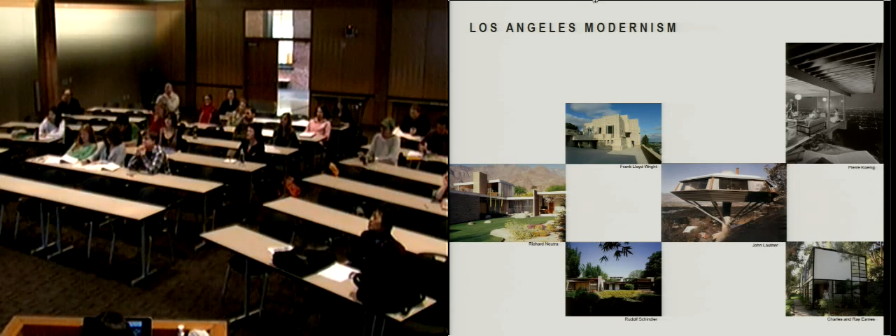For those of you who do not know Los Angeles very well, or for those of you who know a little bit about it, you might or might not know that LA is home to many examples of great domestic architecture. So if you look at this slide, you're looking at houses by Frank Lloyd Wright, John Lautner, Rudolf Schindler, and Richard Neutra. Now this very rich tradition continues today, but it's expanded to encompass building types of all scales, sizes, and programs.

And so we have Frank Gehry, Disney Hall. We have Morphosis, Eric Owen Moss, Hodgetts and Fung. And then coming down to practitioners in their 50s, we have Neil Denari, Daly Genik. You probably know most of these names. And then I sort of did this decade thing. So practitioners in their late 40s or mid 40s include Lorcan O'Herlihy and Larry Scarpa.

Clive Wilkinson, and SPF. So there's a lot of really interesting work going on in Los Angeles. And one of the interesting things is that now there's a younger generation of practitioners in their 30s who are coming up, and whose work really encompasses fully the digital tools that are out there for use. But one thing I would say is different with respect to how they use these digital tools is that much of their emphasis is really on performativity. I think that's a bit of a generational shift, and it's certainly spurred by what we see going on in the world today.

So John's and my practice falls within the trajectory of practitioners in their 40s who have been trying to really build. Our first projects were completed in 1999, a little bit more than a decade ago already. We actually completed 3 projects in South Korea. I'm not going to talk about them, just show them briefly. This is a 50,000 square foot golf club outside of Busan, South Korea. This is a same-scale public swim center in a man-made new park in the city of Ulsan, which is an industrial city, again, in South Korea.

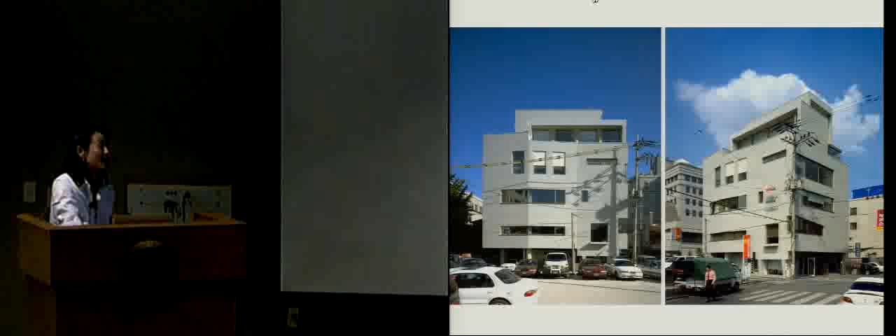And then finally, in the city of Seoul, in a very commercial, trendy, kind of cacophonous neighborhood, is this small commercial building that we did for a client who was the distributor of Coca-Cola in South Korea, and so she wanted something a little bit more hip, a little bit more fun.

But really, while we were doing that work, what we were really trying to do was to build up our contacts in Los Angeles and to really begin to build up a practice there. So if you look at this map, it sort of tells you what we've done for the last

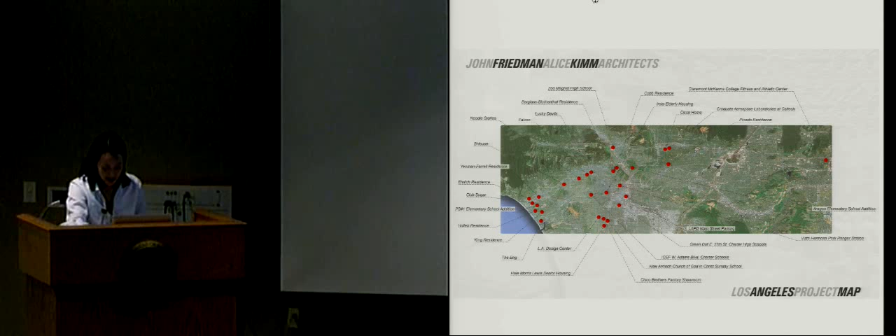15 years, really, since we started practicing together in 1995, 1996. The red dots are actually projects that we have completed in the greater Los Angeles area, and that's what I will concentrate on now. We worked on a range of program types that includes houses, housing, public schools, private schools, commercial renovations, and university buildings.

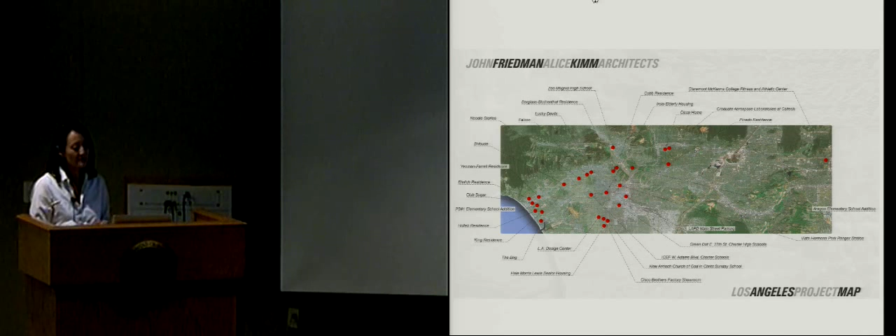And I would say that our sort of concentration is really on the creation of meaningful public space or social space. And when we use the term social space, it is a very deliberate thing because we find social space in private programs such as single-family residences even, and we're always looking for ways to create spaces and environments that will kind of catalyze productive interaction between people.

And so whether we're working on an academic university building or we're working on a single-family residence, we're always sort of looking for those kinds of opportunities.

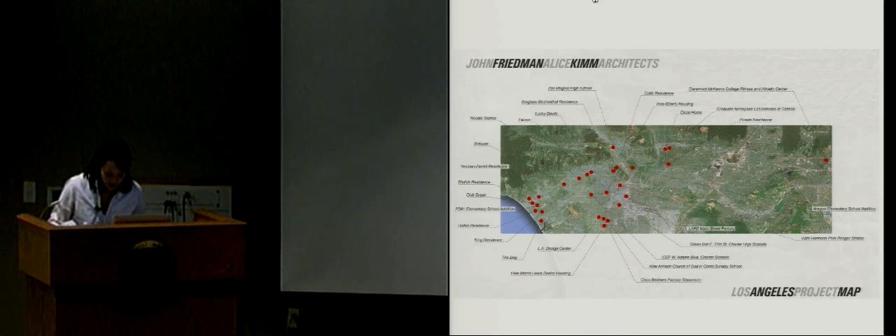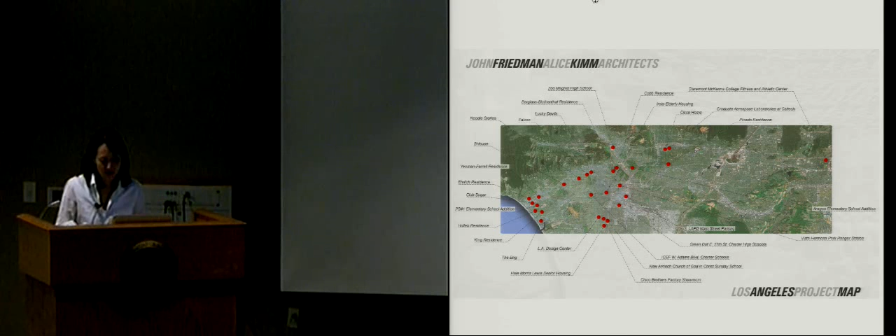The last point I want to make before getting into the work is that if John were here and we were both talking to you, we would probably be switching the talking duties back and forth. And we do that because it's indicative of the way we work. We really do work in a collaborative way, not just with each other, but with those people in our office, and basically pass the work back and forth, whether we're looking at models or digital models or drawings.

And really, there's kind of one rule in the office, which is that we all have to be happy with the work before it goes out the door. Sometimes that can take a very long time, and we have to keep people waiting. But that's sort of the unspoken rule in the office.

And that we feel is also kind of very illustrative of the kind of a new paradigm of collaborative working that we're finding in practice today, because of the emphasis on environmentally ethical practice and sustainability. We are finding more and more that our collaborations with engineers and other types of specialists is really occurring from the very beginning of any design process.

And this is really, it's really been kind of an amazing transformation of the way we work, to go through this with some of our more recent work. And it's also probably the largest reason why I decided to go back and start teaching at USC, which is going through some pretty strong efforts right now to begin to integrate building sciences and technology into the design curriculum. So it's a very interesting time right now.

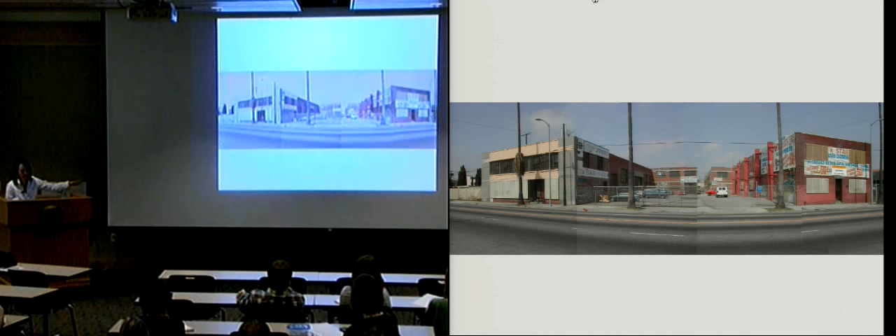One thing, or two things, that we saw as the challenges of this project: number one was how do we create a positive and dynamic image for this complex while not creating any kind of unwelcome foreign presence in this particular neighborhood? And secondly, how do we take advantage of the beauty that we saw inherent in the structure of these old buildings? So those were the two things that preoccupied us the most.

Our solution was to take these old buildings, clean them up, and then layer them with a set of light and differentiated heterogeneous materials that would together provide a set of new clothes for the buildings, but sit very lightly on them so that they would seem both permanent and impermanent at the same time. So you could have the feeling that they could be taken away at any moment, but they still at the same time give the project the identity that our client was looking for.

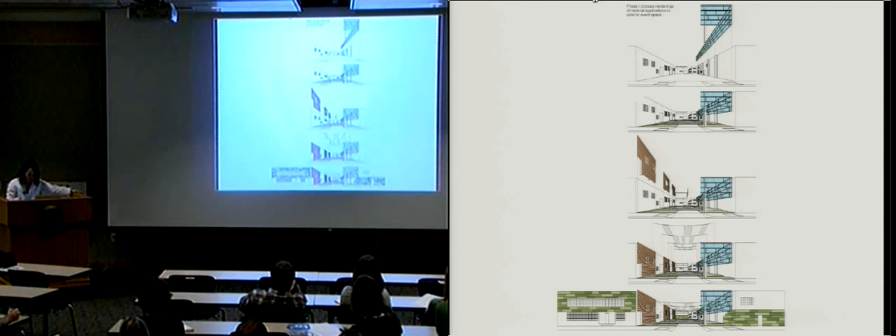They are dimensioned and sized to hold photovoltaic panels at a future date. We used the columns also to create regulating lines across the parking lot, which became the banding for the hardscape and grass strips that you'll see in a minute. And then we introduced a set of wood screens on the opposite side, and finally, we hung this kind of fabric canopy over the entire space.

So the result you can see here is that main courtyard space. And clearly the kind of early experimentation of projects such as Club Sugar really benefited us in terms of materials and ideas. In fact, we sometimes joke that this is our outdoor nightclub. The space has become a pretty large public event space, used for many different functions, parties, and galas. The AIA actually held one of their annual big awards galas at the LA Design Center.

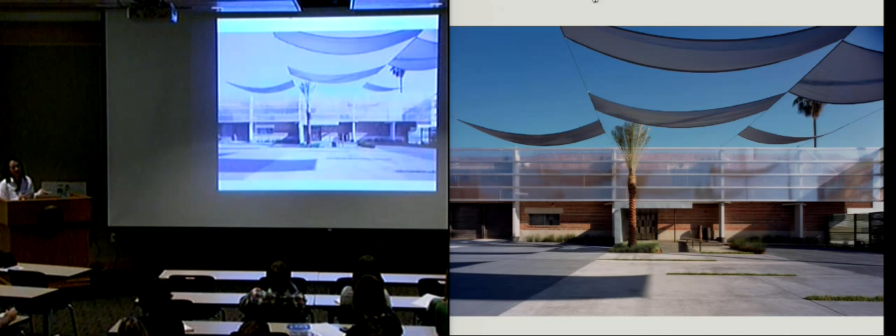But one thing that we were really struck by was how significant to the end result of the design the fabric canopy is. Because in LA, you think about sunshine and palm trees, but what you might not realize is that the sun, the light, the sky usually has no clouds in it, so it's always kind of unchanging, and there's a little bit of monotony to it, and it's usually more gray than blue. So what the fabric canopy does, aside from giving the courtyard a sense of intimacy and scale, is it actually starts to create shadows that move across the space throughout the day, and so it really brings a dynamic quality to the space that we really appreciated.

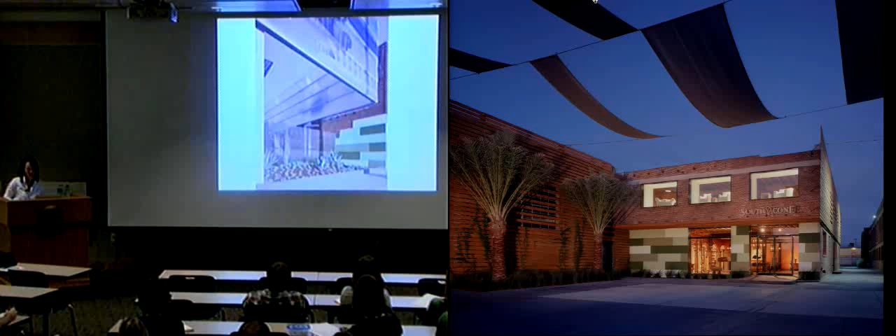So here's a view from the other side, looking to the back. This is a view of that polycarbonate screen, which wraps around and swings around in front of the building with some applied graphics that can be removed at any time. We did add one new column to hold up that corner.

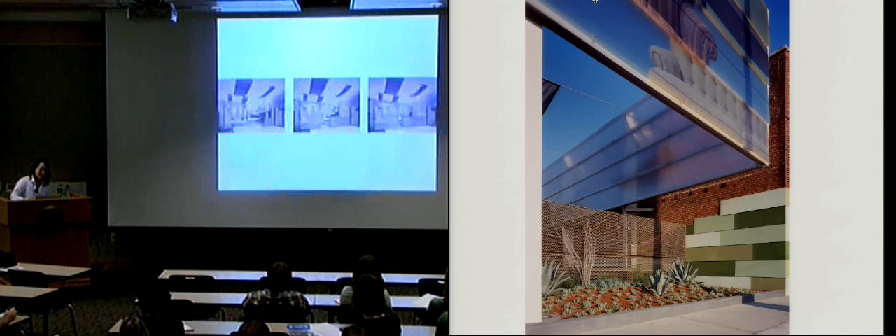And then here's a view of the sliding gate. The gate was a huge dilemma for our client.

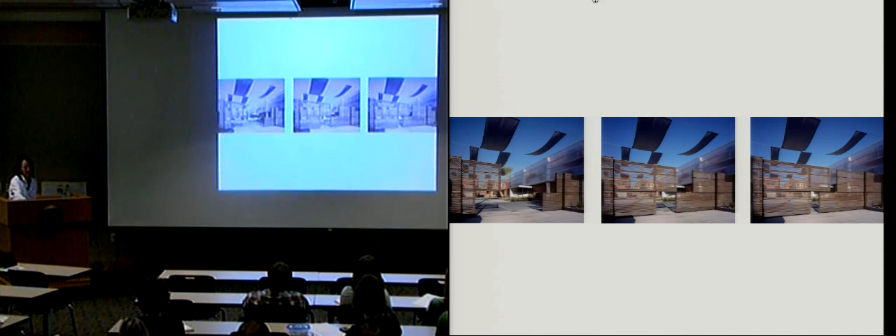He didn't know if he wanted a gate. He was like, I really want to be open to this neighborhood, but on the other hand, this is South LA and I have to worry about security. So our compromise solution was to make a very sturdy fence and gate, but one that nonetheless was extremely transparent. This is just some more detailed shots of the front entrance to one of the buildings, which becomes the headquarters of Cisco Brothers, our client's company.

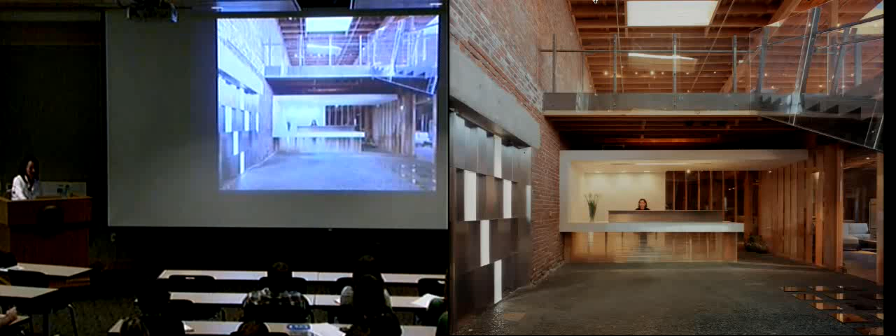On the interior, we actually removed 2 bays of the existing second floor structure to create a double height foyer atrium that houses a stair up to the second floor showrooms. The stair is made out of steel and plastic. Again, we love plastic. It's light, it's clear, unlike glass, which has that green edge and that sort of weight to it.

Up above, we added this floating platform to create a special little showroom area inside the main showroom space, but it actually covers up a loading dock below, which has a raised floor that raised up a portion of the second floor. So it's actually covering up, or taking advantage of, an existing condition.

This is the other side of that screen, and you can see the main showroom. Really, it was about looking at what we were given, which was this beautiful masonry building, this beautiful wood ceiling structure, which was covered by 40 years of gray paint when we got there. So we basically sandblasted it all and pretty much just left it alone. We added 2 rows of skylights, some light fixtures, and then other than that, we just let it kind of sing on its own.

So moving to some residential work. I would say that if the previous 2 projects I just showed emphasize that interest in materiality and the construction of what we call social space, this house really illustrates something that can be described as more of a love of pure space, activated by natural light. I think you will see that in a second.

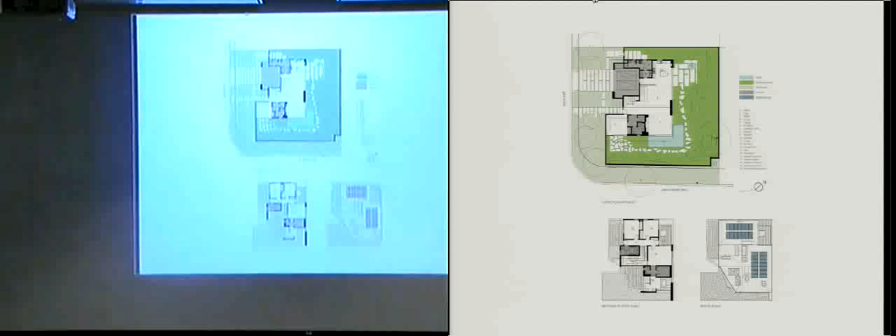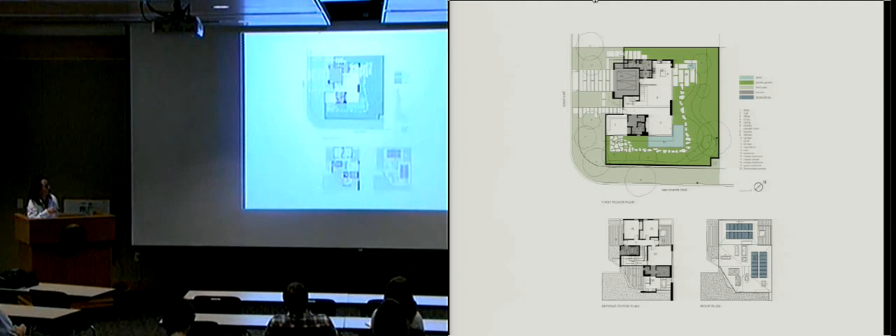And so the challenge spatially became, how do you manipulate the section and the plan to begin to bring light into that farthest northern reach of the house? And so we began to think about opening up what we call the diagonal void through the house, both in plan and in section.

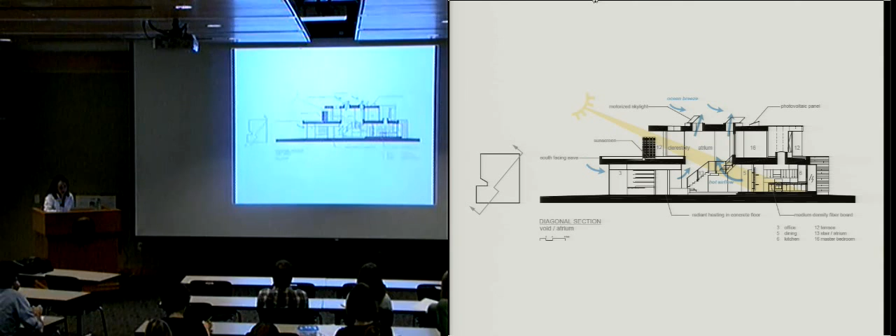And through this, what we call kind of this light monitor at the southern corner of the house, we drew light into that northernmost reach of the house. And you can see that a little bit more in the section. This is actually cutting through that diagonal void, and shows you how the stair creates a double height atrium, and then warm air is vented through these skylights, and then the light is kind of coming in and really hitting that kitchen space. So, and then these are sort of some of the sun analysis process that we went through to look at really how that sun moves through the house to the northern corner during three times of the year.

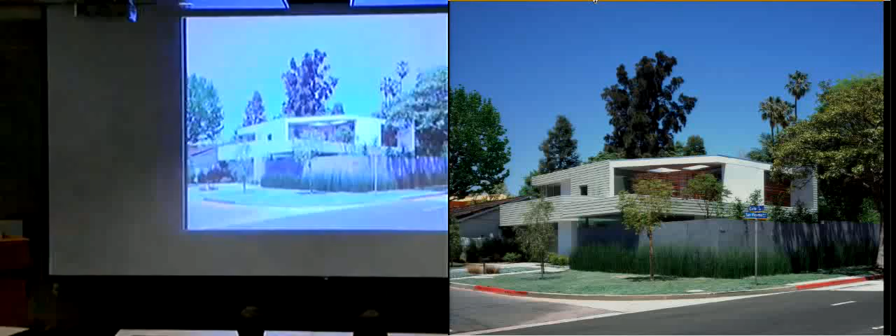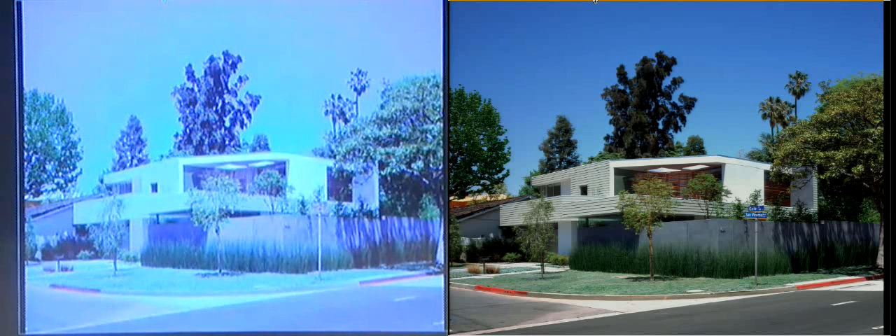So this is a view of the house as it was completed. By cutting back that corner and creating that sort of light monitor thing up there, we created what we felt was a really nice kind of reciprocal urban gesture to the corner, the street corner, which is fairly prominent. And we didn't want to make a mansion or something very bulky on the corner. So this also allowed us to sort of dematerialize the mass of the house at the street corner.

This is a view head-on from the western, kind of the southwestern side. You can see it's pretty solid to keep out the sun. The materials are painted cement board, plaster, and stainless steel garage doors. So they're all pretty eco-friendly.

But there are a few places where we did use wood, and one of them is you'll see these screens kind of weaving their way through the project, and then the front door, and the second floor of the house, and the stair. And so that wood is all sustainably harvested, and it was just used where we really felt we would get the most out of the materiality of it.

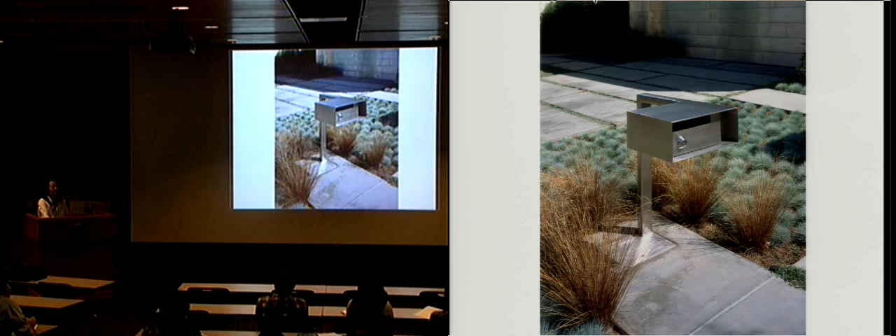I show the mailbox simply because it's sitting in the middle of this drought-resistant landscape. There's a gray water system hidden in the landscape, which takes water from the sinks, etc., and irrigates the property.

So this is a view from the inside. Again, natural light. We studied with Rafael Moneo, who, if there's one thing that he really understands, it's how to manipulate natural light through skylights, and he always taught us that light from multiple orientations is going to give you the best effect, because the light just kind of comes in and bounces around and really does amazing things. And so we always try to introduce light from as many different orientations as possible.

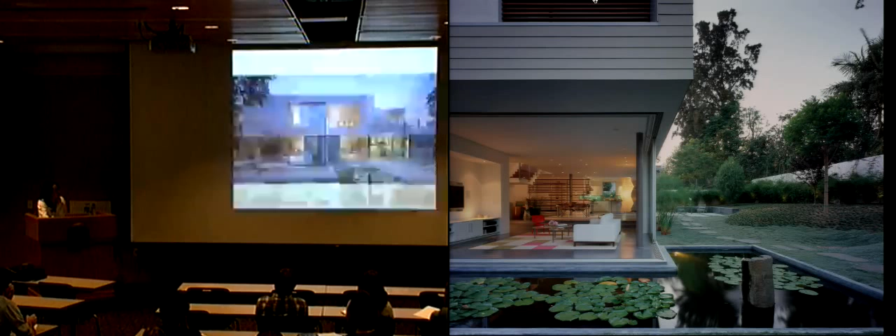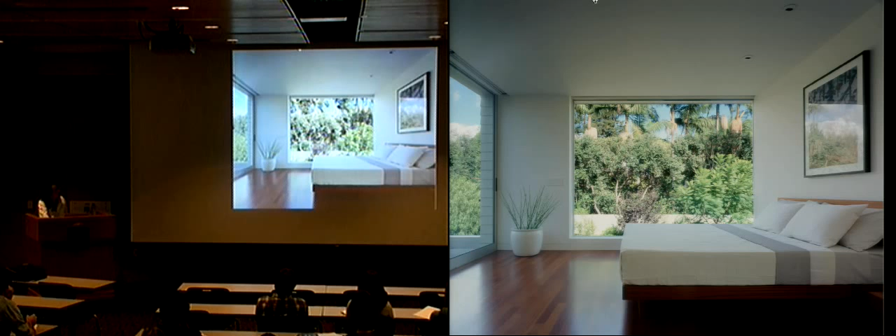Master bedroom, you can see up on the second floor, there's a big sliding door that can pull over the large opening. There actually is a glass guardrail here. You can't make it out really, but it's there. But when the door is completely open, you really feel like you're up there amongst the trees. And so he really loves that feeling.

If you think about the typical suburban house, it usually has a pretty impersonal front door and then a big private backyard. But our clients actually challenged us to open the house up more to the neighborhood. They really wanted to feel and participate in the community in a very emphatic way. So we got rid of the backyard and the front door. The front door is now here, and you end up with this large outdoor space, and the various rooms of the house are really oriented towards that corner and that street.

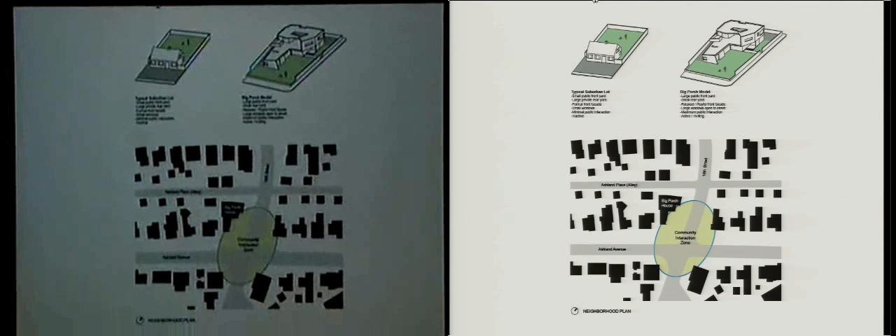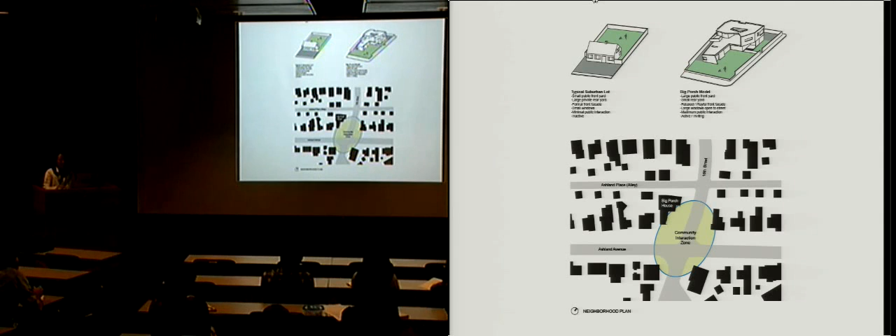So there are ways that they can close off rooms when they want privacy, but really, our clients are just outside or inside. They're always sort of interacting with their neighbors. I just find that to be pretty interesting.

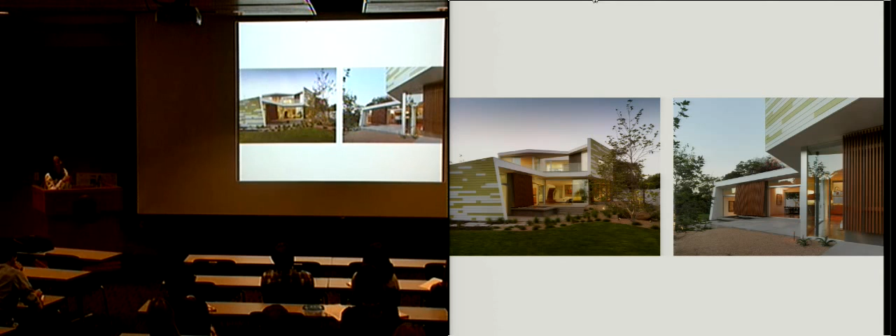This is a view from the street, and inside the wall, you can see that even the painted treatment of the cement board siding begins to dematerialize the mass of the house, and we began to play with ideas of transparency and the relationships between different rooms and the outside. Even at the second floor, the bedrooms wrap around this large roof terrace, which is like a second living room. The kids hang out here, their bedrooms are here, they hang out here, and they call out to people on the street and have a good time with that.

So the interior spaces are a little bit more sculpted than the previous house. Again, this has a lot to do with these particular clients.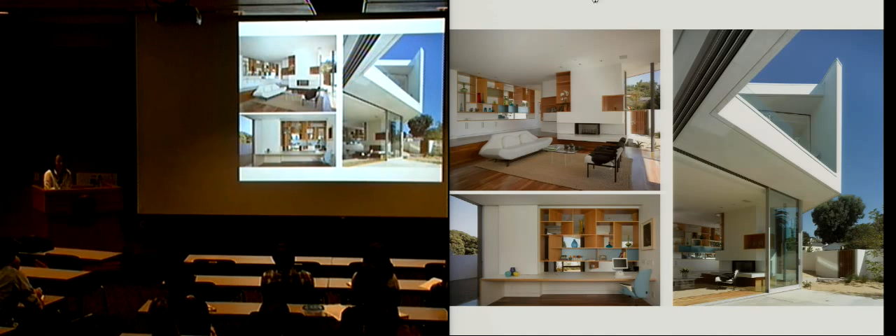Erin, the mom, can occupy her office—she's a landscape designer and did the landscape design for this house. She can sit here, but she can look through this transparent bookcase through to the living room, call out to her kids who are on the opposite side of the house, and enjoy the transparency in that way.

So... oops, that's another house, which I'm not talking about, so I forgot to take that out. Sorry.

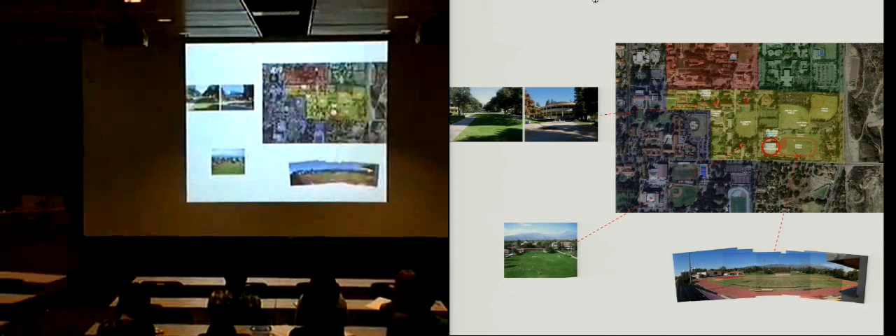So in this next project, which is in design development now—it's on hold probably for about 9 more months, is our guess—there's a ramping up of scale again, back to the scale of those earlier Korean projects, and even bigger.

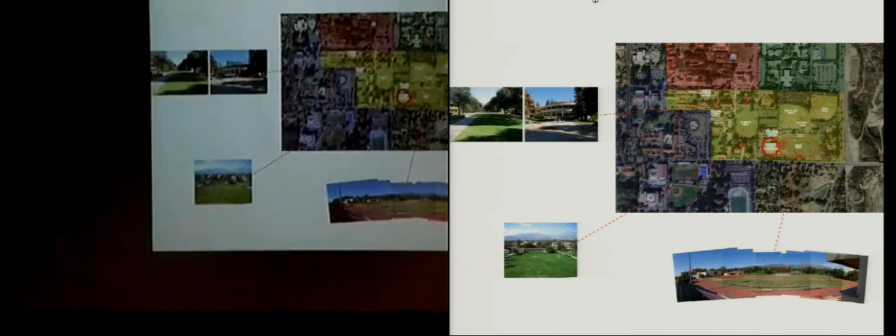This project is for Claremont McKenna College, part of the Claremont colleges. You might have heard of them—it's a group of colleges about 40 miles east of LA, nestled at the foot of the San Gabriel Mountains. There's Claremont, Harvey Mudd, Scripps, Pomona. It's a really nice kind of community. Each college has its own emphasis, but they all work and collaborate together.

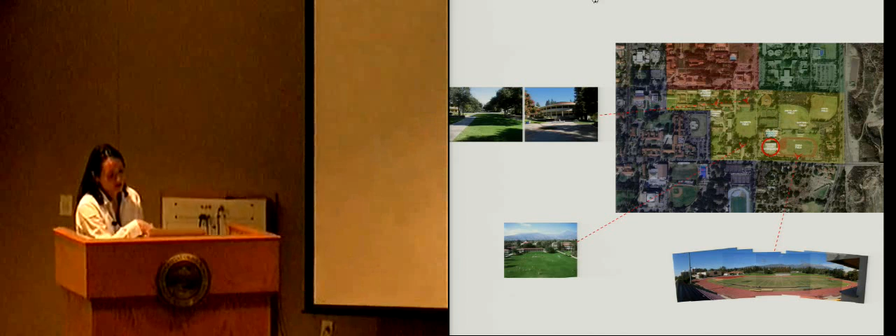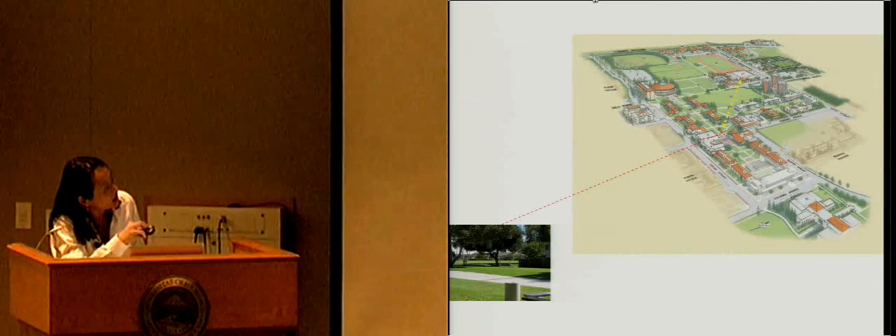So the project is actually for a new approximately 100,000 square foot athletic and fitness center. If you look at this rendering of the campus plan, you can see that the main academic quad is here. Our site is through this major circulation path through Parents Field to here. So our building will replace this existing gymnasium and have a strong relationship to the track and swimming pool, etc.

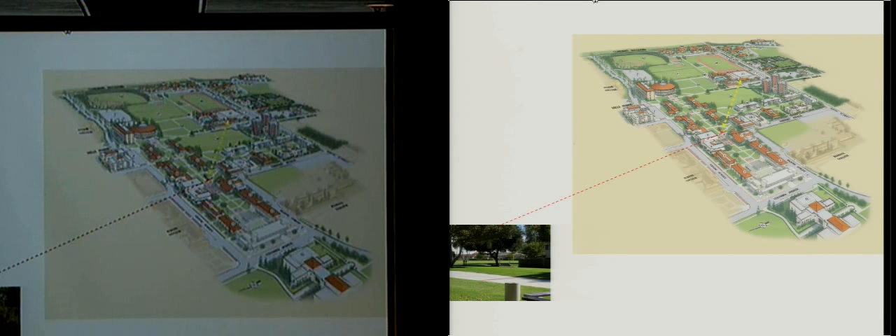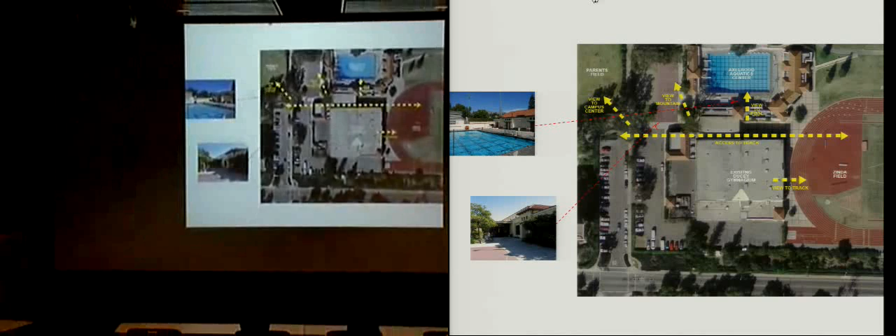If you look at it a little more closely, you can see that the site is pretty constricted—you're basically hemmed in by the swimming pool, a road, and track and field. And because our program is actually much larger than what's existing in that gymnasium, we knew that what we did would have to be fairly compact.

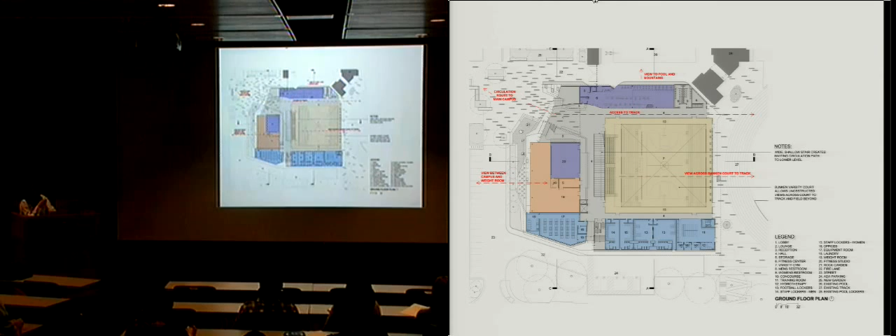So the relationship to the pool and the track are made through the circulation paths between. If you look at the section, the main gymnasium floor is actually buried another level below grade, so that when you enter the gym from that lobby floor, you can see it better here, you are actually looking through the gym out beyond, and you get a view of the mountains. You can kind of see that here.

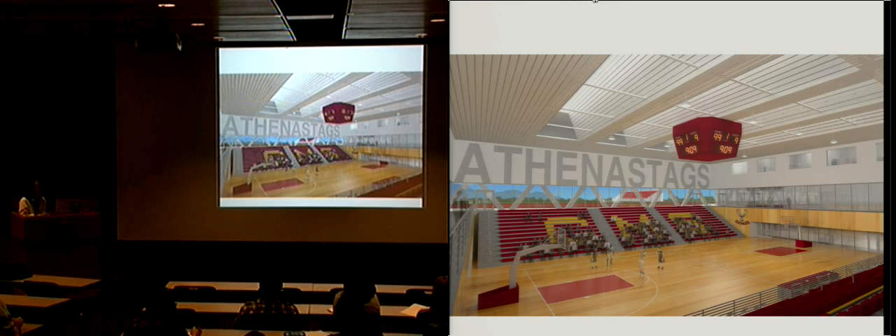And it really begins to create a space that is more formal, and by formal I simply mean not as casual, it has a little bit more oomph. But again, for us, the really important thing was capturing those views to the mountains beyond and bringing in the natural light.

Going up to the second floor, our main goal was that we don't want it to be the kind of overlooked part of the building. So there's a secondary recreational gym here, which sits on top of the weight room. It has a very strong visual connection to the varsity gym.

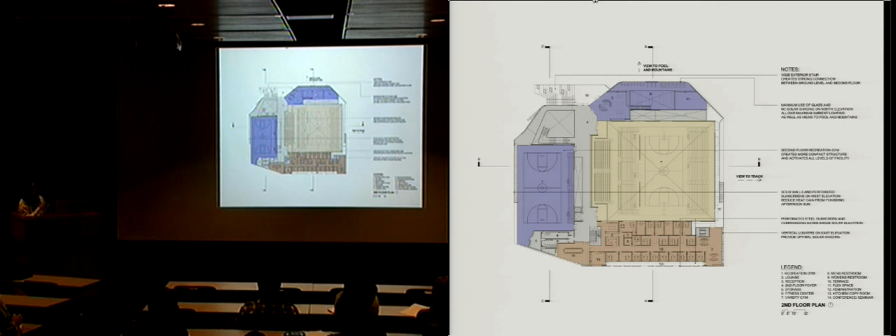And there's a separate landscape stair that takes you up from that outdoor plaza up to the second floor, and you can actually enter the varsity gym and occupy those upper bleachers or filter down, or you can go directly into the rec gym. You can also access the upper level of that double height fitness center and look down on the ground floor. Again, very transparent building.

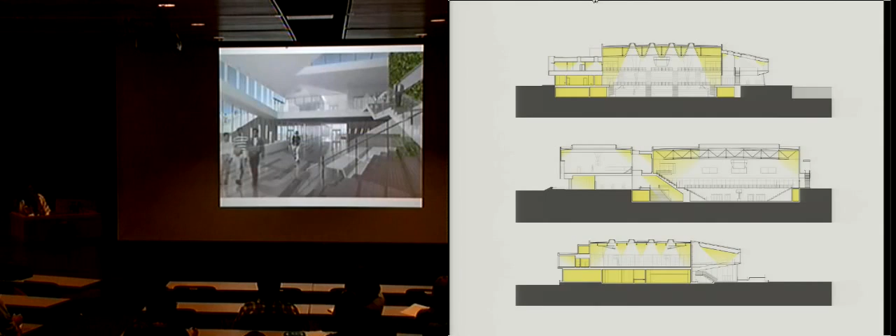These sections give you some idea of those relationships that we were looking for. And this is a view of that lobby, so you can see how transparent it is and how you can really get views of all of the main spaces of the building from the lobby, as well as views beyond.

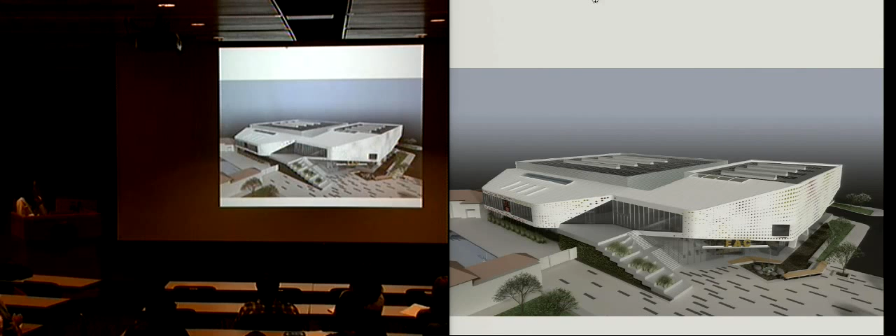Looking at the building from its external view, we wanted to create, the building is compact, but we wanted it to be relatively athletic and sort of muscular in spirit. We have begun to play with the development of the skin as a breathing, perforated skin that can start to make references to the way the body behaves during athletic performance.

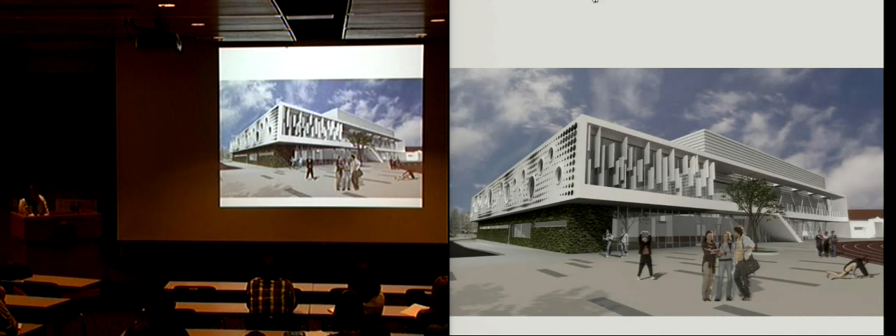So this is an eye-level view, and then close up the other side facing the access road. And then as you turn the corner to the track, you have a different sun orientation, and so we've introduced vertical fins there.

So that project is ongoing right now, and you can probably guess that we have begun to incorporate more into our work the digital tools out there. We do most of our modeling in Rhino, but it's really this next project that I'm going to show which allowed us to really expand our understanding of digital design as well as fabrication tools.

So this next project is the interior renovation of a 3-story historic academic laboratory building at Caltech, and it was for the Graduate Aerospace Laboratories of Caltech, which is abbreviated GALCIT. And GALCIT is a super interesting group of people.

What we didn't realize when we started this project was that aerospace engineering encompasses everything from cancer research at the cellular level to looking at space structures or large rocket ships. So there's this whole range of research that takes place that is so broad, we were just sort of at a loss as to how to begin the process of conceptualizing the project.

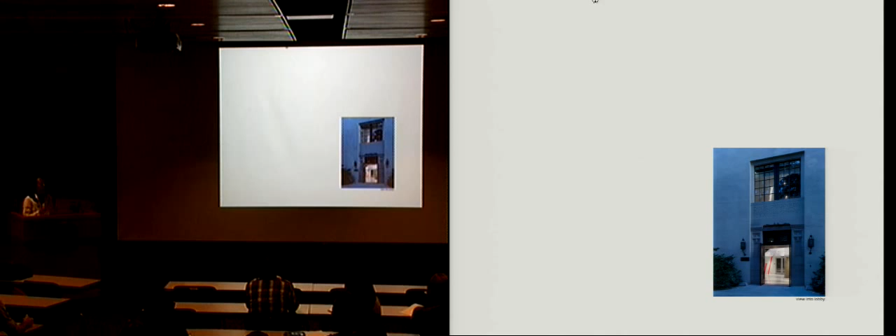The kind of attitude that we had towards the research and the research imagery was very important to the department, and how it was expressed in the design was very important to them as well. So if you look at the front door of the building, I think you get a sense of the historical nature of the building.

One of the challenges was how do you create a dialogue between this existing structure and the new insertions we place into it. So we ended up deriving our formal language for this project not from any local physical context as much as the notion of flow. You see a little diagram showing what's happening to a little object as it's pushing through perhaps a wind tunnel. This building, I should have mentioned, used to be occupied by a double-story high wind tunnel, a huge container that objects get hurled through, and the behavior of those things are analyzed as they move through or collide with other things.

This large wind tunnel had been used to test every single airplane that was built since airplanes were invented until, I think, earlier this century. So when the wind tunnel was removed, it left a huge void in the building, like a double-story high void, and so the building was not very stable.

We were actually brought in, and the umbrella program for the project was simply a seismic renovation. But programmatically, looking at the idea of flow seemed appropriate since almost all aerospace engineering involves studying flows, which harkens back to looking at how materials behave under differential pressures, whether those materials are fluid or solid. So we took that as a broad conceptualizing base from which to start.

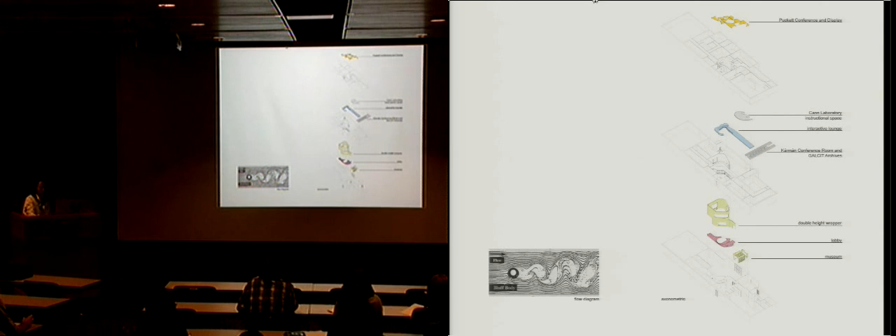What we ended up doing with this set of very disparate spaces that occur throughout this three-story building was to design insertions, which take the form of suspended ceiling elements and wrappers that come into dialogue with the existing structure and give each space a distinct identity.

If you look at the first floor plan, this is the front door of the building, and we actually created a brand new lobby, which is very transparently connected to this new laboratory. The laboratory has contained within it the remnant of the double height space. We ended up filling in a lot of it, but we left this portion double height to allow experimentation with larger structures.

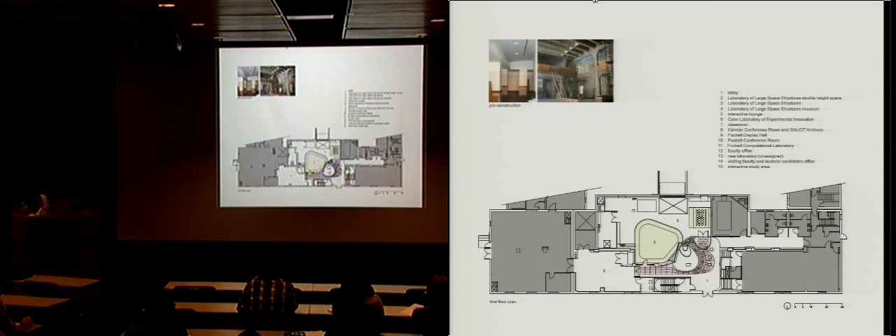Our two major insertions were this ceiling element and then this wrapper wall, which wraps that double height space. This is the end result, and we worked with the manufacturing company Freeform out of Utah to create this three-dimensional ceiling topography, which is broken up into panels and then fabricated using vacuum forming and CNC milling processes.

So the whole thing becomes the new signifier for the department, kind of their identifying element, and also becomes a lantern within the space. And this is the big window into the double height laboratory space.

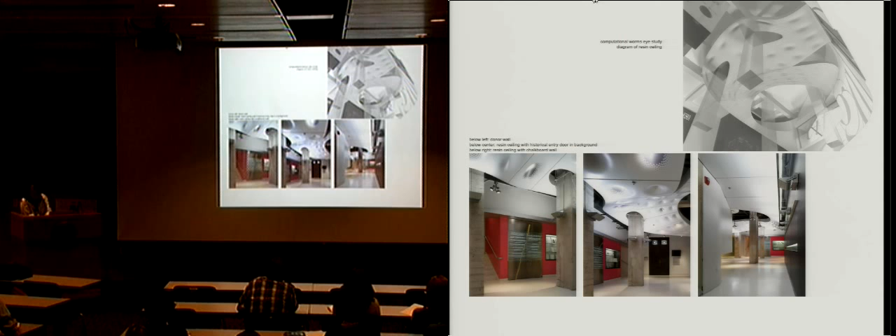Just some more views of that. There were other elements such as donor walls and director's portraits, and a big chalkboard wall that is placed there so that after lectures, which are given in a lecture hall directly adjacent to the space, you can come out and dialogue using the chalkboard. That chalkboard gets used all the time.

This is just a worm's eye view, which I think begins to show how we dealt with existing structure. We love the old concrete structure. It was all covered up before, so we took all the gypboard off, painted some of it out in the ceiling area, but just left the rest of it exposed.

These are just some working drawings, shop drawings, and diagrams showing how the panels are suspended, using very low-tech means, and then how in some of the panels, the middle layer of the resin—it's a composite resin made up of three layers—has been cut away to allow light transmission to happen.

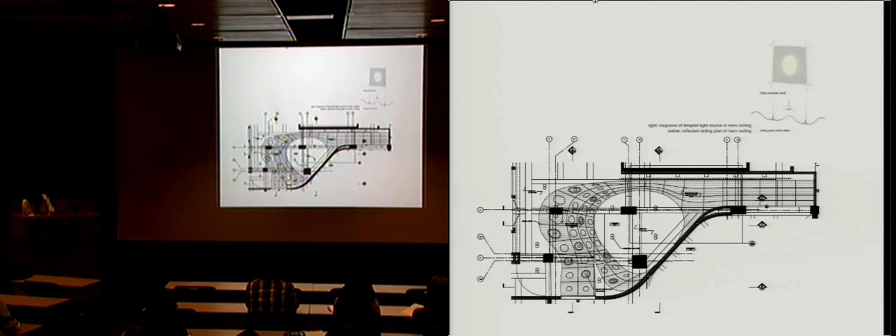You can see, this is one of them. We worked a long time on coming up with what we felt was the right dot array to perforate and peel away that middle layer to allow the light to come through. It's a really interesting process working with Freeform, both during the design as well as manufacturing and installation period.

When you enter that two-story high lab, we were asked to create what the professor called a small museum for his artifacts. He is an engineer named Sergio Pellegrino, who is known as the father of the unfolding space mirror. He works a lot with structures that fold up and expand.

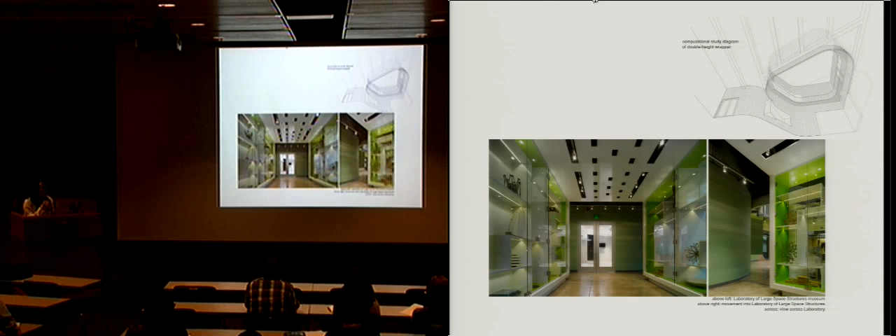Many of them, well, almost all of them, are quite incredible models made by hand. He sometimes works with architects to generate some of these things. And so that became another element of the project.

So this is a view you can see back out into the lobby from inside. This is a new kind of big loading dock door that we had fabricated using glass. Previously, it was a solid door, so you can imagine this building was just very dark and dingy before.

This is one of the weather balloons that he experiments with. A view of that double height space. And then moving up to the second floor.

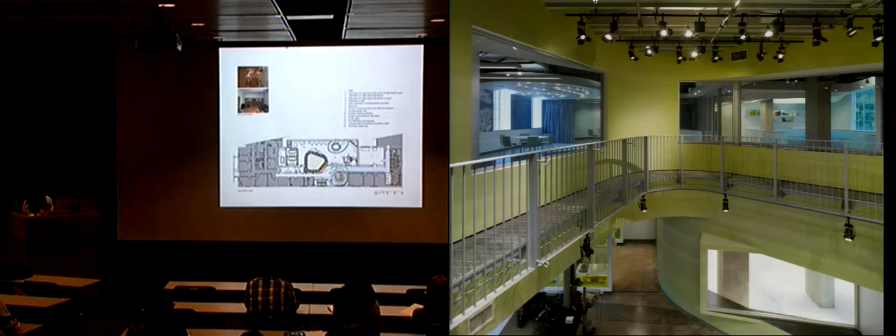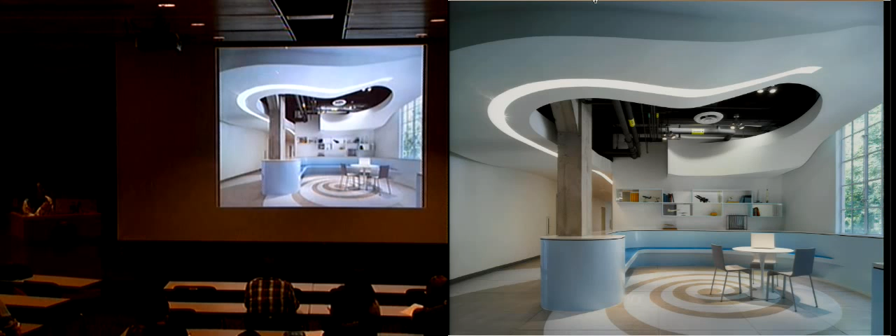I'm just going to move through these very quickly now, because the kind of processes in which we designed and worked remained pretty consistent throughout the building. Second floor interactive space, no vacuum forming here. This was all steel, conventional steel stud construction using curved steel tracks, but in the end, formally, you end up with the same sort of dynamism. So it was interesting to contrast traditional versus newer forms of construction.

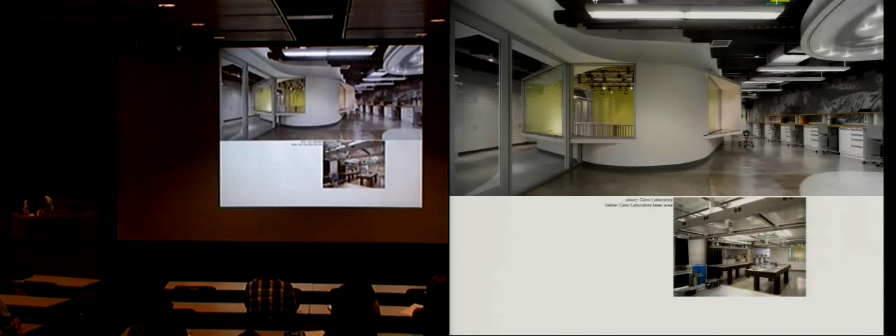This is the sort of origin of that. We worked with a professor in the department who does a lot of research on the heart. So these are views—this is a view on that second floor from that space into the double height lab below, downstairs. And then this is the teaching lab that wraps around that double height lab. So you can see how transparent everything has become.

Just a view. And then at the end of this floor, the second floor, we were almost done with construction, and then another donor came forward and provided $300,000 to transform this old conference room into a new combined conference and archives display center.

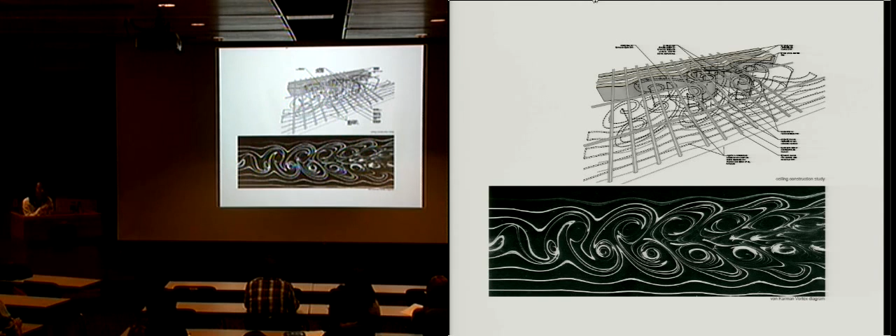At this point, we were told that this room would really be dedicated to the work of Theodore von Karman, who was the founder of the department, but also considered the father of modern aerospace engineering. This is one of his seminal discoveries, a diagram called the von Karman vortex. So we were asked to literally transpose this diagram into something.

So what we ended up doing was creating a ceiling made out of felt, and we chose felt for its acoustic properties because people actually defend their theses in this room. So the room really needed to function acoustically in a superior fashion.

So we worked with the professor to get the form right, and all these layers. It was very easy to construct—we just put up a kind of skeleton layer of steel studs, then laser cut plywood forms, and then hung the felt down from them.

Then we simply bolted or screwed the plywood forms to that steel framework we had up there, painted it all out so you can't really see it, and what you're left with is this half-inch industrial strength felt. You can make out the felt panels are actually just riveted together, stapled basically. So it was another interesting process.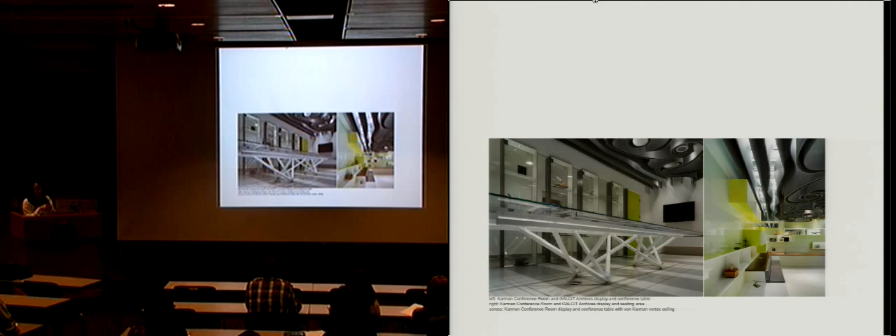And then we designed a conference table that doubles as a display table. So that was that space.

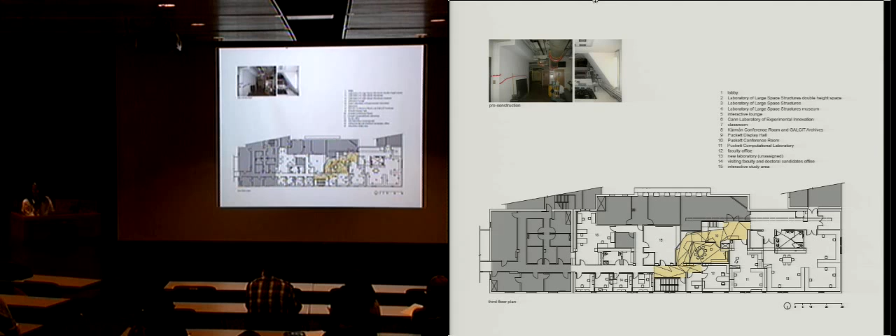And then finally, upstairs, an entirely different thing again. We were asked to honor the donor for this area of construction. His name is Alan Puckett, and he was one of the primary engineers of the Delta Wing airplane, which, if you can imagine what a stealth fighter looks like, basically has the triangular bat wings.

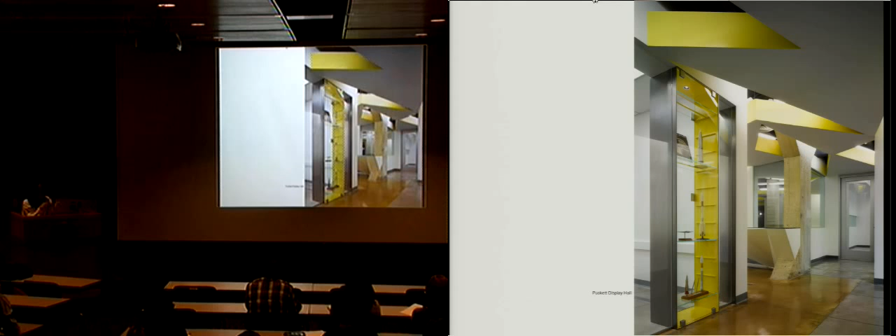We found a relationship between the forms of the Delta Wing and the existing column capitals and knee braces, and started to play off of that, and again created—inserted a ceiling structure, and then a kind of wrapper wall here, which becomes the display wall for honoring the life of Alan Puckett.

So this is that kind of curving wall. This space was a landlocked little pocket of space that they basically just asked us to make usable somehow—to create a little conference room and display area. So that's what we did.

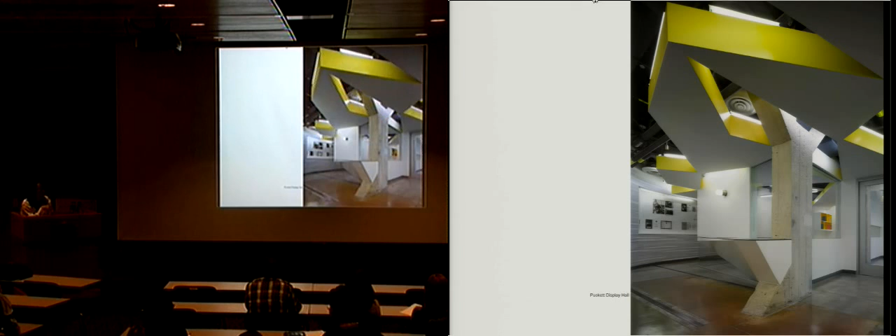So that's that project, and I'm just going to end. I'm running out of time, aren't I?

I'm going to end with this last project, an installation we completed last month in Mexico. It was funded by the National Endowment for the Arts and organized by the City of Los Angeles' Department of Cultural Affairs, so it's really a public project for the City of LA.

It was to design a guest of honor pavilion for the 2009 International Book Fair of Guadalajara, an annual event that attracts about 600,000 visitors over the course of a week and a half.

The guest of honor, in this case Los Angeles, brings in speakers, entertainers, artists and fine arts. It was this incredible event where filmmakers, a mini film festival, the Getty Museum, the Los Angeles County Museum of Art, and Otis College all took shows down there, and about 50 to 55 writers traveled to give talks and sit on panels.

The Guest of Honor Pavilion became the central space that everybody flowed through. It was about 20,000 square feet, on a very low budget, and the charge was to show off the dynamic nature of cultural life in Los Angeles.

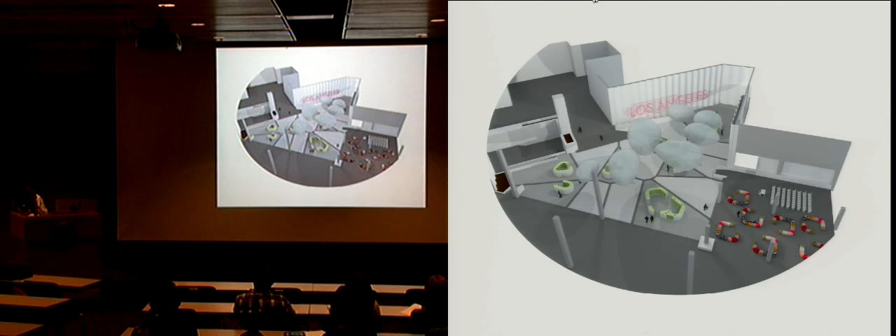Finally, in the space above our heads, we hung what we call idea bubbles. They came from the idea that you can't have innovation without a set of ideas, and an idea always starts in somebody's head and then becomes expressed and manifests in physical form.

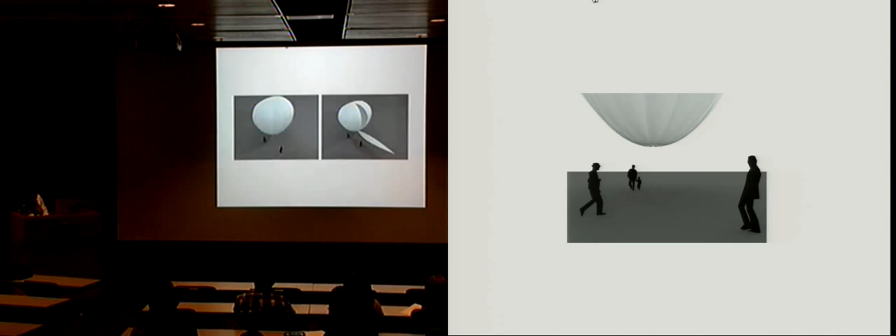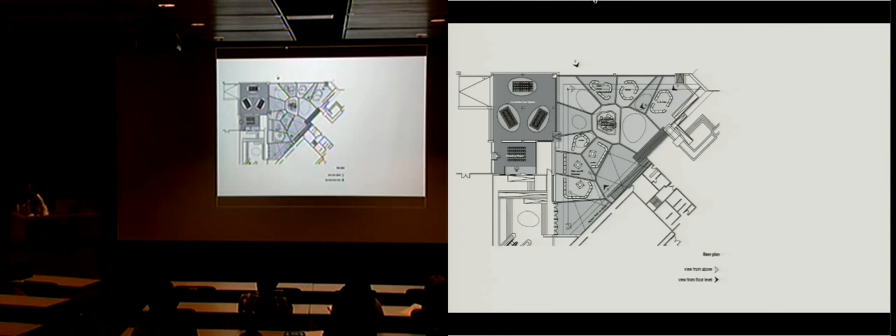We were thinking of Sergio and his weather balloons at the same time, so we developed these bubbles and balloons, thinking about how to have them manufactured and engineered to work with the geometry of the Voronoi patterning set up for the zones below. They evolved into elliptical shapes that had to be specially engineered because they were not symmetrical on two axes. So the design evolved in this way.

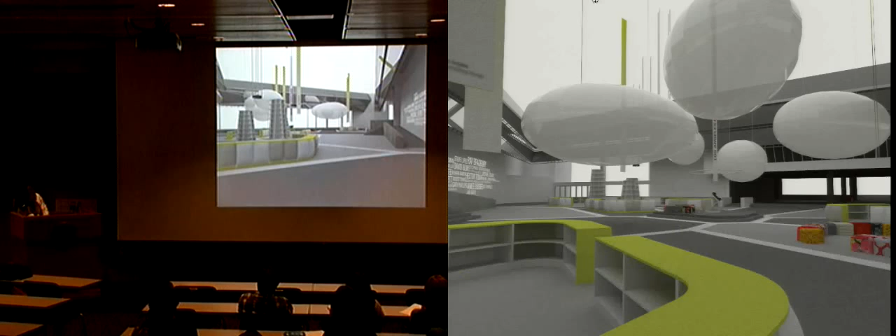And we added certain other elements, but the end result was this. And so we ended up with five bubbles.

And what we did to then portray Los Angeles in a bit more detail was to commission ten independent films, each of which touched on a different theme of Los Angeles. And those films became projected on these bubbles.

So when you're moving through the space, the bubbles are above your head, and this one is actually 10 meters long, so it's like a 30-foot long balloon hovering. The bottom of it is about 8.5 feet above your head, so you really feel the weight of it.

But by using external projection, we were able to begin to portray some of the life of Los Angeles and all of its various facets through these films.

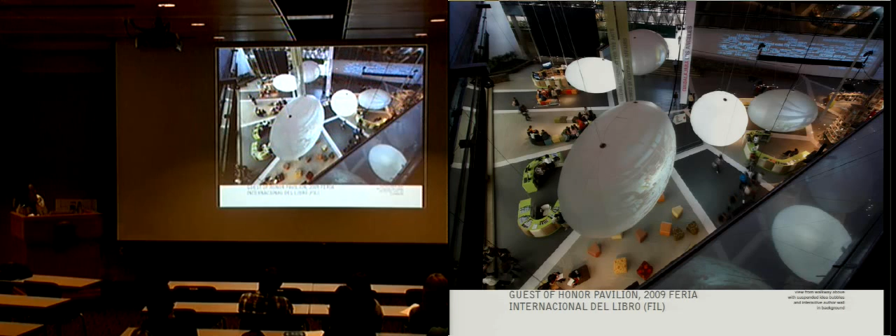And then at the same time, create this interactive element whereby you stand in the central platform and operate this giant touch screen and can manipulate this humongous wall at the other end of the building, or at the other end of the space.

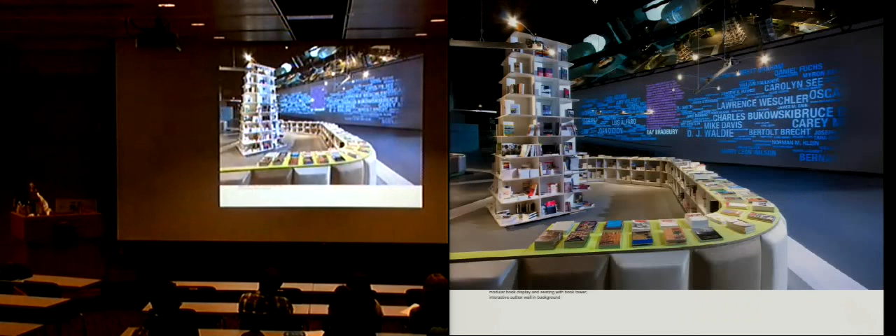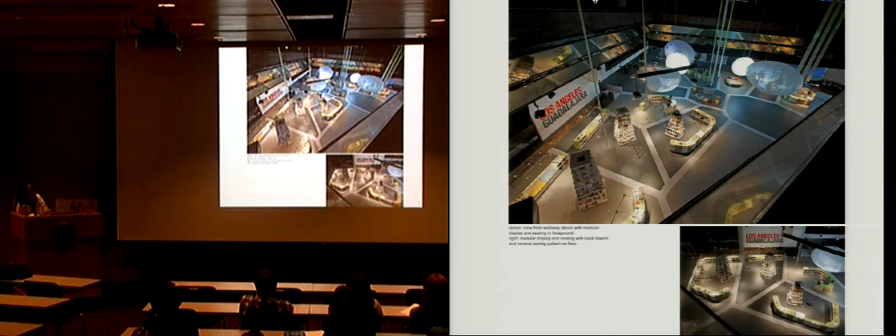So this was our way of trying to portray a city without saying something definitive about it, but rather just doing it through the quality of the space and the interactivity.

So that's really what I wanted to end on. I think I've talked too long already. So thank you very much.

Yeah, if there's any questions. No questions?

Thank you. Yes. You talked a lot about Los Angeles, and I'm just kind of curious how you wound up there. Were you so tied to where you started to practice there?

No, it actually really was just kind of getting out of grad school. For me, it was like I just wanted to have a very different experience from the East Coast, where we went to grad school. I had some really close friends in LA from college and high school, so it really became, let's go to LA and see what happens. So it was really learning about LA through working in LA.

Any other questions? Okay, one more. Yeah, I really love this idea of the experiential interactivity between users and these elements in your building. I was wondering if you heard any feedback from people in the building, like what has really worked for them or what they really enjoyed.

Well, I will say that this project, which was the most overtly interactive one, apparently was a huge success. The local people of Guadalajara who were there really felt like they could relate to the ideas and the technology, and because the technology was made so accessible, that level of interaction for them really worked. So it was a really super positive experience.